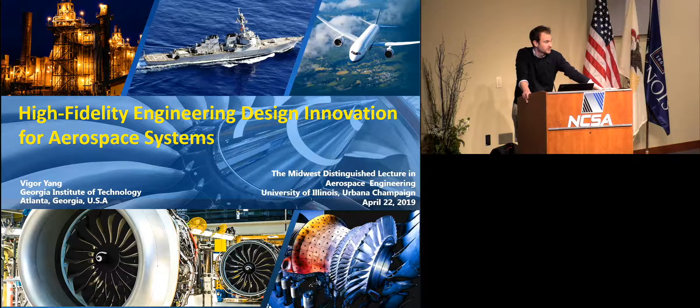This is more than a laser pointer.

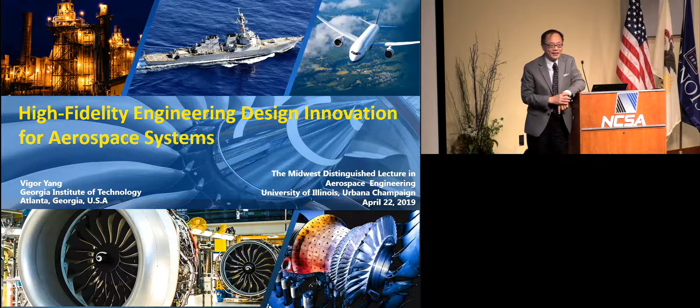Thank you, Dan, for this wonderful introduction. I couldn't be more grateful to the friends and colleagues here. It's a tremendous honor to give the lecture today. When I received the bag from Dan, I thought Dan would first present to me an empty bag, then depending on my lecture, he may put the gift into this bag. Yes, thank you. Also thanks to Cedric for the tremendous effort. As you mentioned, to organize one lecture by itself is a tremendous effort, let alone 4 lectures within a week. Thank you once again. And Stacy, thank you so much. I just couldn't be more grateful to you.

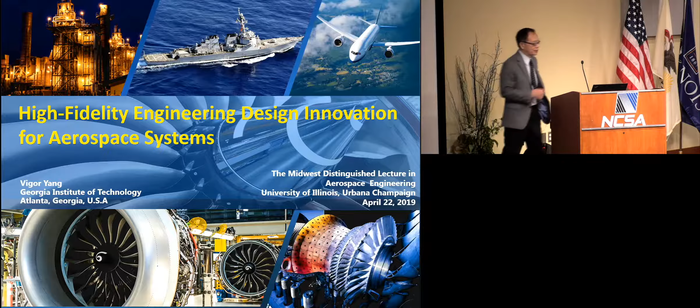What I'd like to do for the next 45 or 50 minutes is share some of my perspectives on high-fidelity engineering design innovation for aerospace systems. That's what I'd like to do, yes.

Let me start with human space exploration and transportation. Human space exploration commenced in 1957 when Russia put the first satellite in space. Then in the past 70 years, tremendous progress has been made. For example, the ICBM in the 50s and early 60s, and in 1969, the Apollo program, which essentially allowed us to put 12 men on the moon.

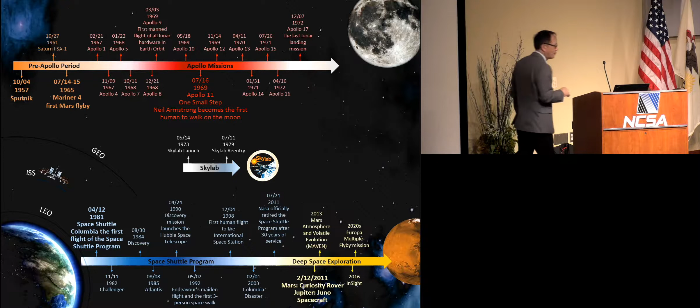In 1981, when I was a grad student at Caltech, the space shuttle program started, running all the way through 2011. Within that 30-year time period, there were 135 flight missions under that program. Lately, everybody is so excited about Mars exploration. That's tremendous progress made in 70 years.

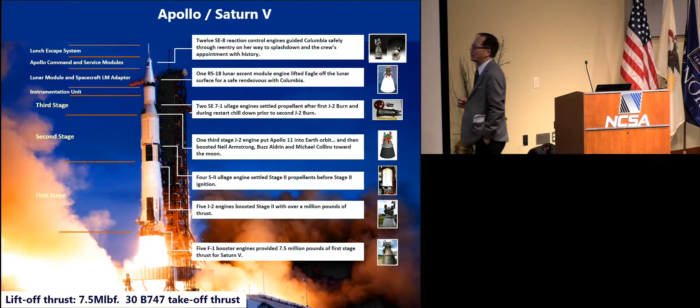But what about the propulsion system? From that perspective, in the past 70 years, there were 32 major rocket engines established within the United States. The number is not that big, but every single engine we established in the past 70 years was a tremendous accomplishment.

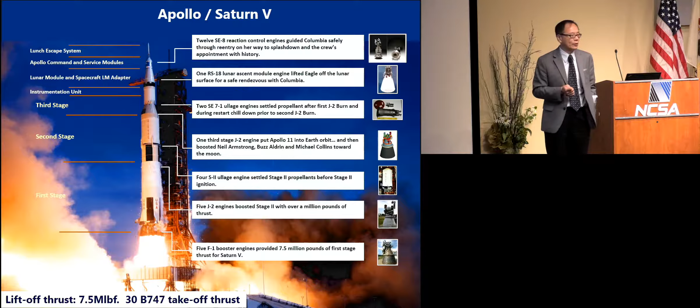Here is a very typical example. The picture shown here is the Saturn V launch vehicle used in the Apollo program. Looking at the first stage, there are 5 F1 engines. Each engine produces a thrust of somewhere around 1.5 million pounds. That's equivalent to 6 Boeing 747 liftoff thrusts, showing the magnitude.

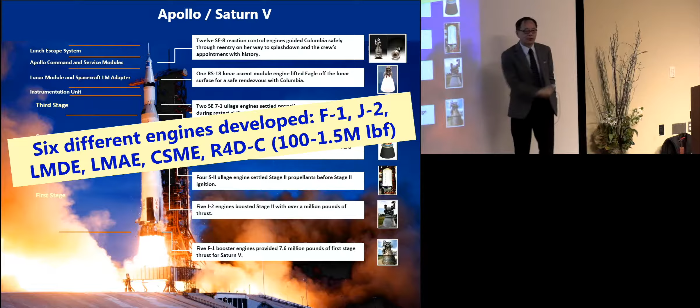For the entire Apollo program, the nation developed 6 different kinds of engines, starting with the F1 engine, a very mighty engine, all the way to reaction control engines. For example, that thrust level is about 100 pound force. This shows the range of thrust of those 6 engines established in the 1960s.

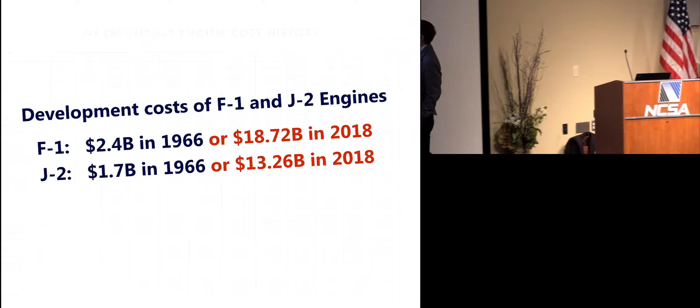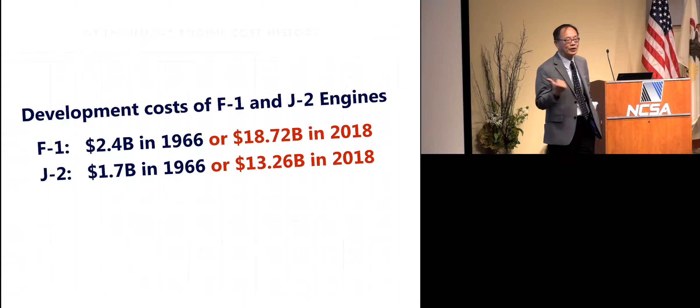For rocket engine development specifically, essentially we do not know how much money we spent on that. Out of my personal curiosity, I invested almost 2 years' time to find out the money we spent on development of the F1 engine. This is my number. The background is the spreadsheet. Probably you noticed that I personally went through, to your surprise, almost several hundred pages of spreadsheets in order to get this number.

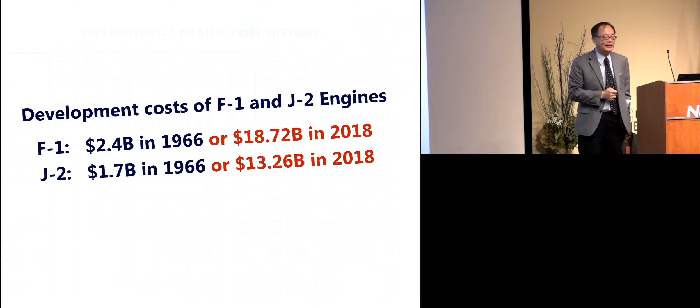For the F1 engine, the nation spent $2.4 billion, but that's 1966 money, equivalent to $18.72 billion in today's money. What about the upper stage engine, J2, the second stage? That engine burns liquid oxygen and hydrogen. For that engine, we spent $1.7 billion.

Again, that's 1966 money, equivalent to $13.26 billion in today's money. So that's the money we spent on developing those engines.

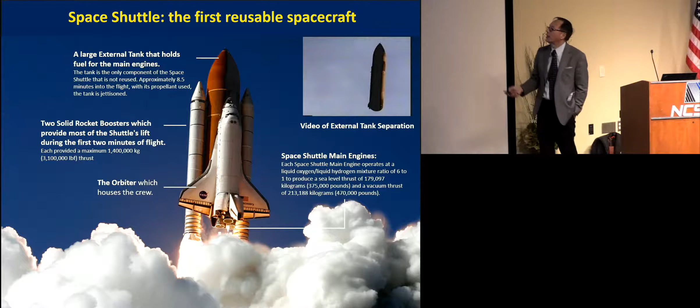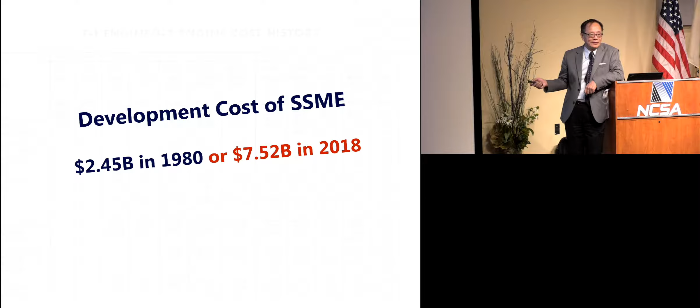What about the space shuttle? Well, the space shuttle essentially was the product of the 1970s and 1980s. For the space shuttle main engines, there are 3 shuttle main engines down here—yes, 1, 2, 3. The next question is how much money we spent on development of the space shuttle engine. That's $2.45 billion in 1980, equivalent to $7.5 billion in today's money.

So keep in mind those big numbers. But what about the future? Well, we still need rocket engines, but these days we are talking about 3 different kinds of missions.

First, of course, we are still interested in LEO missions, near the Earth—that's essentially commercial and military flights. Then the next thing is we want to go back to the moon, which means several hundreds of thousands of miles. Then, in the future, probably 10 or 20 years from now, we'll be able to send people to Mars—a long distance. But no matter what we do, we still need rocket engines.

So the question is: how much money should we spend on developing our next generation engines? There was a huge debate about 5 years ago in Washington, D.C., because the issue was, should we develop our next generation engine, and if yes, how much money should we spend, and how much time can we afford?

I was engaged in that very serious, and frankly speaking, very heated discussion. I was asked by a senior colleague in DC how much money we should spend. I tried to avoid that question because it's a very political one. But at the end of the day, they put me in a corner and said, you must give us a suggestion. So I said, well, looking back, 50 years ago the nation spent $2 billion.

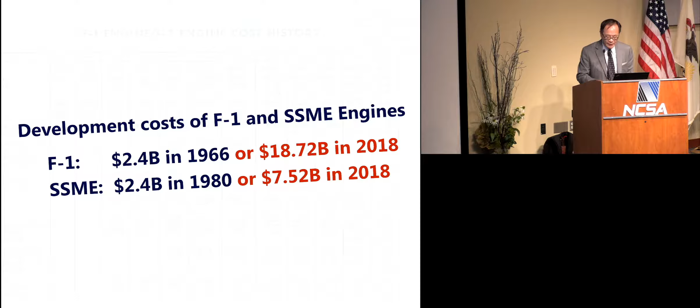The reason is this industry hasn't got a chance to incorporate recent and projected advances in other areas, for example design, advanced manufacturing, materials. So if the nation cannot accomplish that within $1 billion and 4 years, my suggestion is just don't do it. Why not wipe out that industry and use our money for something else. So that's my advice to the government at the time.

Then the next thing is this: if it's $1 billion, tell me, if you are a decision maker in DC, then you say $1 billion. The next question is, how would you like to spend that money?

Well, let's go back to the history. This shows cost versus development year. In the past, we spent 2% of the entire budget on initial design. Engineering, from day one all the way to completion of the program, that's about 10%, no, about 15%. And then most of the money was spent on testing, trial and error. If one design didn't work, then let's redesign, then retest.

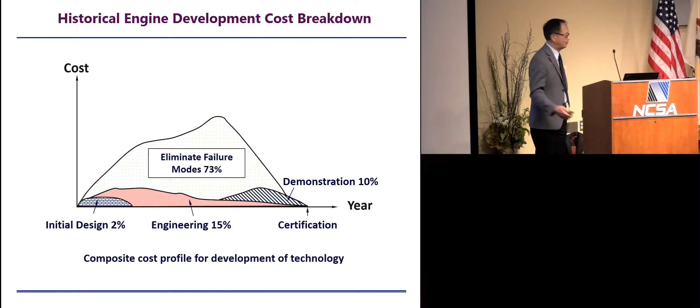And the remaining part, 10%, is for system integration and demonstration. So the issue is: is this a good business model? If the answer is no, then what should be a good business model? And then I also shared with people...

...some historical data. Taking the F1 engine in the Apollo program as an example, that's the money we spent. The number of tests for single engine certification, almost 2,000, more than 2,000 full engine test firings. That means rework, redesign, retest, and so forth. That number is 203 times. That means each rework cycle cost us $9 million at that time.

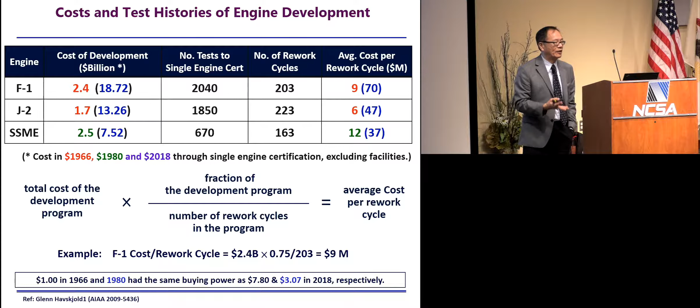That's equivalent to $70 million in today's money. So that means if the initial design is not very close to the final design, and we have to redesign and retest, each rework cycle would cost us 70 million. Who can afford that? Of course nobody can afford it. Then that goes back to the next point.

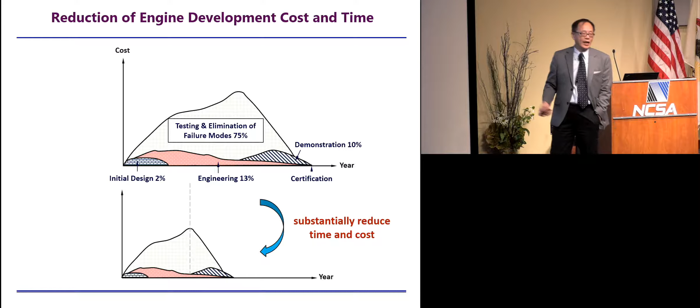Well, the next point is: we want to substantially reduce the time duration for engine development, and also substantially reduce the cost. So from that chart, down to this one. Then if this is the case, the next question is, how should we do the business? Well, this is what I proposed, yes.

We should make a major investment in the early stage. In other words, initial design probably should take 15% of the entire budget, to the extent the initial design is very close to the final design. By doing that, we can substantially reduce the resources required for testing and elimination of failure. So this is a new business model.

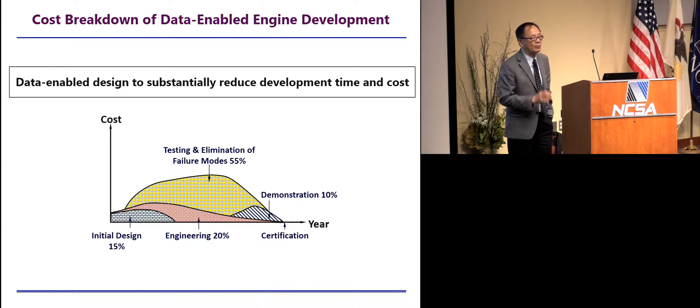Well, conceptually, this is very nice. Everybody would love to see this chart. If you can make your initial design very close to the final design, everybody would agree with you. But scientifically, technologically, and engineering-wise, how to accomplish that? That's a big issue these days.

So, well, here, I'd like to give you a simple example, still using rocket engine development as a case study. Then we see how we can proceed to make major changes, and also at the same time substantially elevate our technology basis.

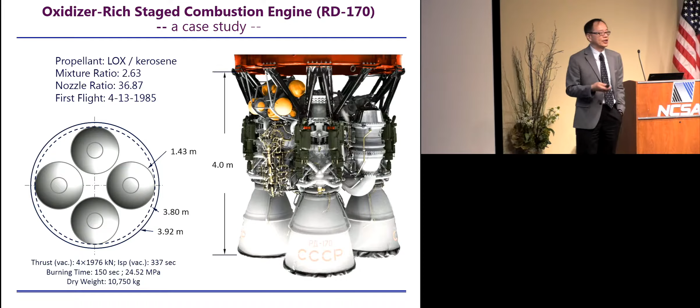Well, what we're looking at is the most advanced rocket engine ever produced in history. This is a Russian-made engine called RD-170. RD-170 produces 1.75 million pound force. It's even bigger than our F1 engine, but that's one aspect. The second aspect is this engine is so much more efficient than American-made rocket engines, about 10% more efficient in terms of ISP.

Which means specific impulse and so forth. Well, if we focus on the combustion system, propellants burn in two stages, one in the pre-burner, the second in the main chamber. In the main chamber, pressure is very high.

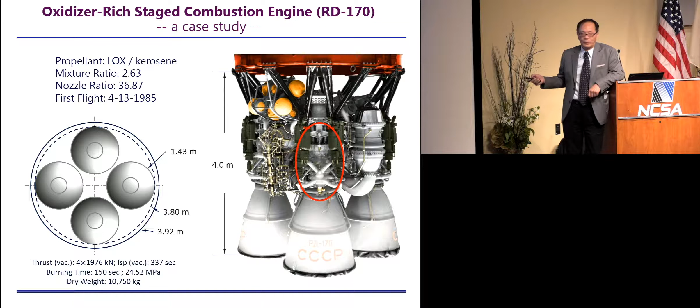Pre-burner pressure is well above 7,000 psi. For comparison, an aircraft gas turbine engine operates at a pressure anywhere between 100 to 300 or 400 psi. And the main combustion chamber pressure well exceeds 3,000 psi. So, very, very high pressure device.

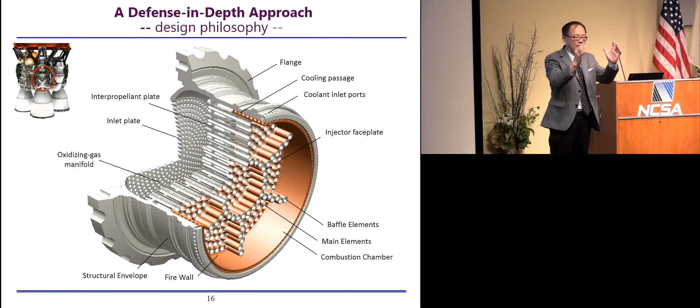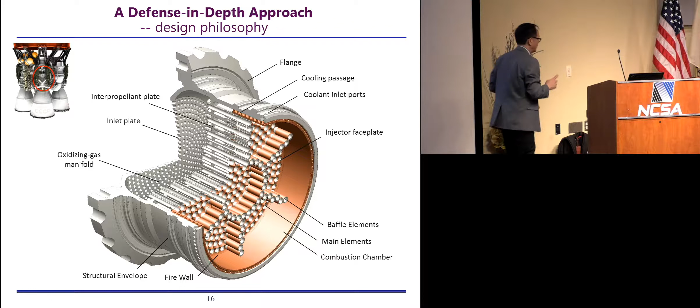So I have to say, this is a rather complex system, and the physical dimension is not too big - about that big. Can you imagine that? For such a limited physical space, the device is able to produce such a huge thrust, sufficient to lift two Boeing 747 aircrafts. So that's the scale of the energy.

This one shows another view of the combustor. So now we want to develop such a high-performance combustor. The question is, how should we proceed in order to save money and also make sure everything can be done in time?

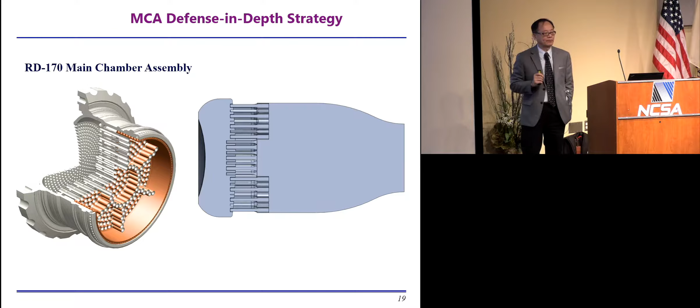Well, first thing is this: what is the purpose of this design? The purpose of this design, of course, is to make sure this combustor is high performance, almost 100% combustion efficiency, and also everything is very stable - there's no unnecessary unsteady motions within this combustion chamber. If that's the purpose, then the next thing is we have to develop our design strategy.

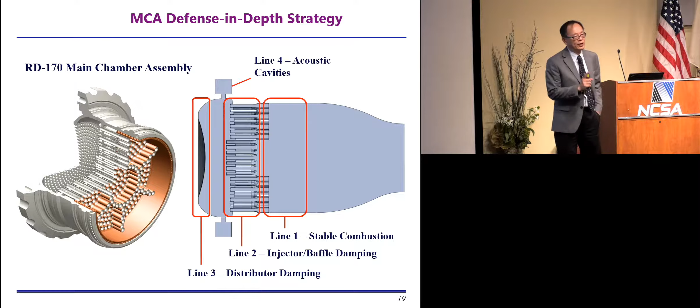What is our design strategy? Well, the design strategy is: number one, whatever injectors we develop must be 100% stable by requirement. Then we use internal viscous damping to provide the design margin. If that design margin is not sufficient, then the third line of defense is we want to utilize the acoustic damping provided by the flow distributor. If those three lines cannot provide us with sufficient design margin, then the final resort is we want to use an acoustic cavity.

Conceptually, we consider this so obvious, right? Everybody probably would do the same thing. But I have to tell you this was not a design practice used in the US in the past 60 years. In the past 60 years, whenever we develop a rocket engine, the first thing is the injector - we do our best to make sure it's 100% stable, but we're not quite sure whether it's 100% stable or not.

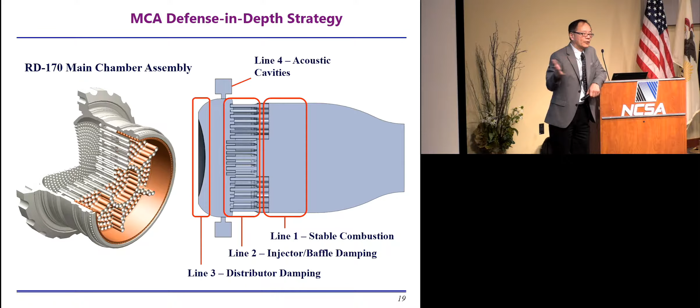So let's assume this part is 90% stable. Then we want to utilize the internal viscous damping and other devices to provide the design margin to make sure it's 100% safe. And I have to say that kind of design strategy must retire. In today's environment, we have to be very bold to make sure this one is 100% stable. So the issue is, design strategy must be established upfront. Otherwise, we may not be able to accomplish what we really want to do.

Then the next thing is, every system must be regarded as a dynamical system. Because it's a dynamical system, we need a mathematical model to characterize and describe the dynamical behavior of a combustion chamber. In this case, what we did is we developed a wave equation with many source terms on the right-hand side. Then we use this equation to characterize the dynamical behavior of this combustion chamber.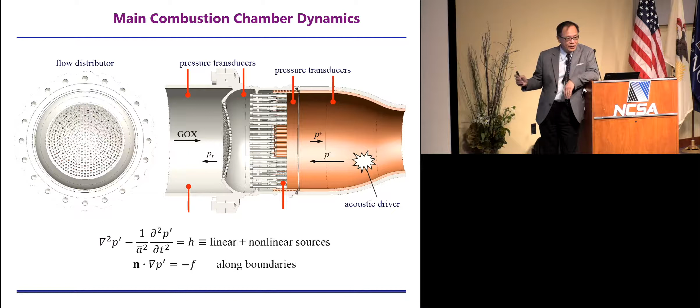So conceptually, we may want to consider this a very high-level model and so forth. But I have to say that it's easy to write this equation - what about those source terms? That's number one. And number two is how to solve this equation, especially with a complex geometry, and especially with very complex inlet and outlet boundary conditions. So those are the practical issues that we have to address.

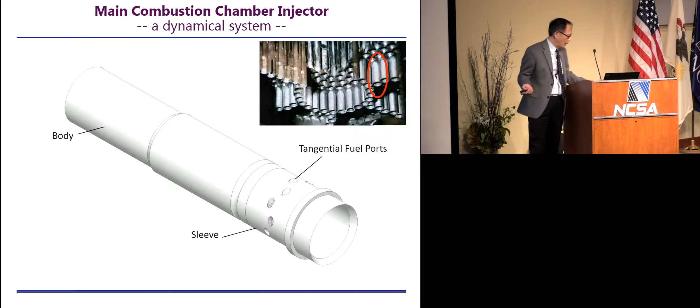So then another thing is this: when we look at that system equation, which essentially is a wave equation, there are many source terms. So how to describe those source terms? Well, in that regard, we have to go back to the injector, because combustion occurs in connection with each single injector within this device. Well, this is the injector that people used for this particular case.

And this one shows more detailed design. Essentially, what we're looking at here is gaseous oxygen is delivered into this injector, and the kerosene fuel is injected tangentially through the outer annulus. Then combustion occurs down here.

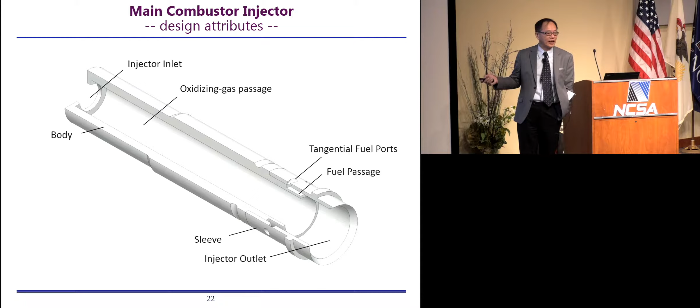When we look at this geometry, then the next thing that we have to ask is how many design parameters are associated with this generic design. Essentially, there are 12 parameters - for example, the length, the diameter, the inlet confinement, and also location and size of kerosene fuel injection. So there are 12 design parameters for this case. And number two is, what may be the most appropriate range of each design parameter? Taking this RD-170 rocket engine as an example, the length of this injector is on the order of 100 millimeters.

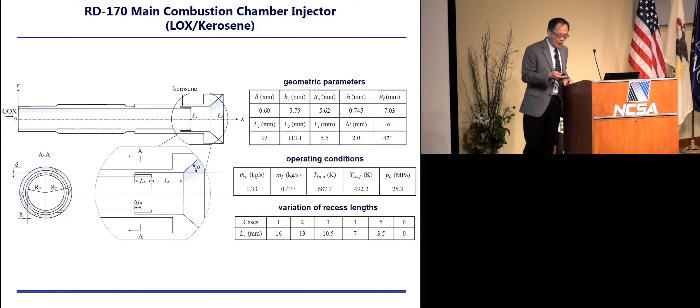Combustion occurs down here, and the physical domain that determines the combustion behavior is very, very small, on the order of 0.5 millimeter. If we do not understand the combustion behavior within that very small spatial domain, or if we do not know how to control the dynamics within that spatial domain, then the chance to make a stable rocket engine is almost Mission Impossible. So that's the challenge we are facing these days.

Well, and what about the physics? Before we discuss the design, what about the physics? Here I want to share with you 3 different cases. Case 3, down here, we have the center tube protruding into this area. In this case, the protrusion always goes to the entrance of this taper region. The first case, there's no protrusion at all.

So from the design aspect, we have to ask ourselves, there are 12 design parameters. For such a design, if we put this device on the test stand, if something goes wrong, which design parameter should we change? That's question number 1. Question number 2 is, if we have to change the design parameter, how much should we change? So those are the issues.

In the past, those issues could only be answered through test firing, so-called trial and error. But these days, we must be able to answer those very basic questions up front in the initial design stage.

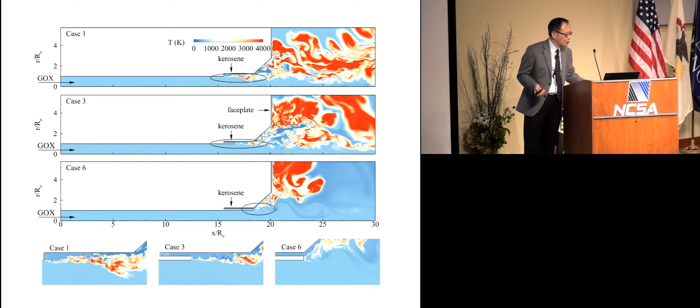So that's why everything must be high fidelity, in order to make sure we have a full understanding of the situation.

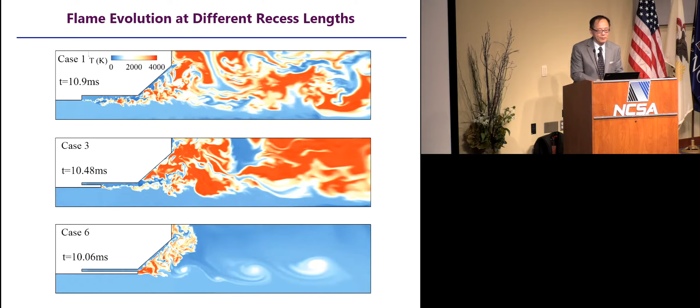The next one shows some movies about the flame evolution down here. As you can tell, the protrusion, the length of the protrusion of this very small component, determines the entire combustion dynamics. So this is pretty much the situation. Once again, the physical length of this inner tube is around 0.5 millimeter.

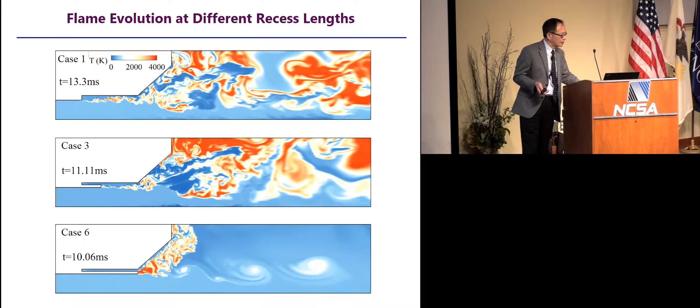But then, another thing - oops, the file is a little bit too big. Oh, sorry.

As I mentioned, that's for the injector design. Then the next thing is this: we can do high fidelity simulation or modeling and simulation for a given design, but then the next thing is, whether or not that's the best design we can possibly have. And what is the best way to survey the entire design space? Because we have 12 design parameters there.

Well, to answer that question, we have to utilize the most recent advances in data science. We have to use emulation. So the procedure is the following: we started with a conceptual design, say this is my injector, there are 12 design parameters. For each design parameter, we provide a range of dimensions.

Then after that, what we really want to do is survey the entire design space. But with 12 parameters, to survey the design space using high-fidelity simulations, such as large eddy simulation, is not very practical because you just have way too many cases to do it. So the next thing is we have to apply DOE techniques, design of experiment techniques, to down-select the number of cases. Then after that, we do the so-called emulation.

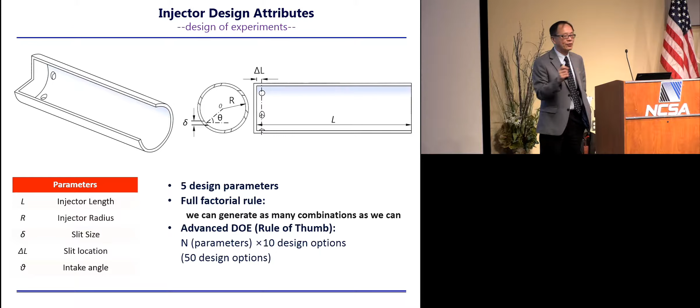So 5 design parameters. For each design parameter, let's assume we provide 10 choices. Then the number of choices becomes 10 to the 5th power. That number is huge - practically impossible. So we apply a statistical method, so-called design of experiments, to down-select to 30 cases.

Hopefully, those 30 cases can represent the situation for the entire design space. There are a number of techniques we can use, for example MaxPro or other design of experiments techniques to do it. But for this particular case, we consider 30 design cases.

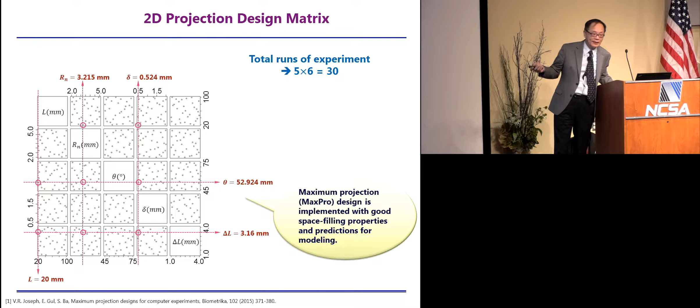This shows the space filling of the techniques we used, and the range of dimensions we consider. We consider a very short but much wider swirler, or a very long but much smaller injector. This shows the parameter range, and through the DOE process, we down-select 30 cases.

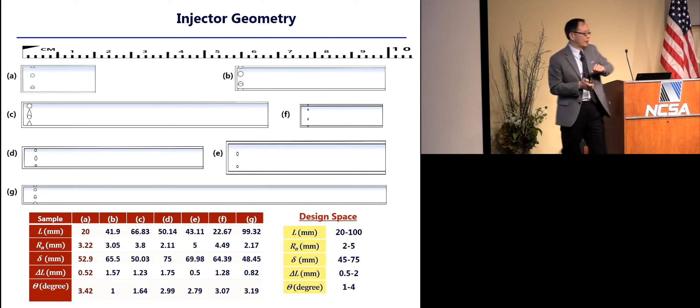The next thing is: what is the best way to describe the situation over such a design parameter space? That's a real issue, and it requires a technique we call emulation. Some people call it kriging, and some say it's part of machine learning or even artificial intelligence, depending on what you want to call it.

We consider 30 cases. This is case 1, that's the injector, then this is the downstream flow domain, and that's case 2 and case 25. The technique we used is called common POD technique — we map different geometries to a common geometry. We conducted large eddy simulation for each of those 30 cases, then mapped the results to a common configuration, which is why it's called common POD technique.

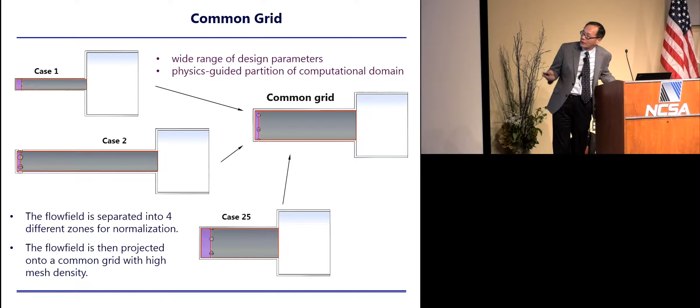Once we have done that, this shows the different domains. Once we have done that, we can quickly survey the entire design space, very quickly.

This shows the emulation results. The upper half shows the large eddy simulation results, and the lower part shows the emulation results. What we did here: we consider 30 cases covering a broad range of parameter ranges. After 30 large eddy simulations of those cases, we obtained the training database. Then using that database as the basis, we do so-called surrogate modeling, but in our case it's called emulation.

This shows the emulation results. For this particular case, the results are very encouraging. In terms of accuracy, for example the time evolution and the different spectral information, the accuracy is almost 99%. The good thing is this: large eddy simulation may cost hundreds, thousands of CPU hours minimum, but emulation you can probably do on your desktop computer in less than one hour.

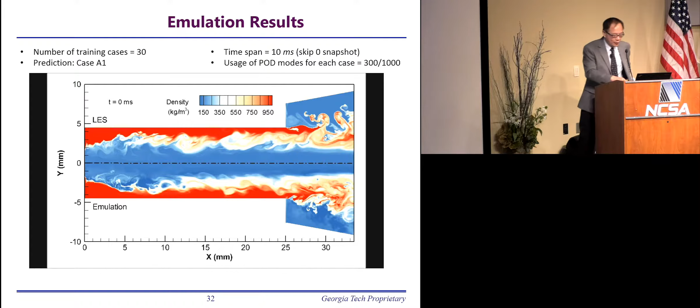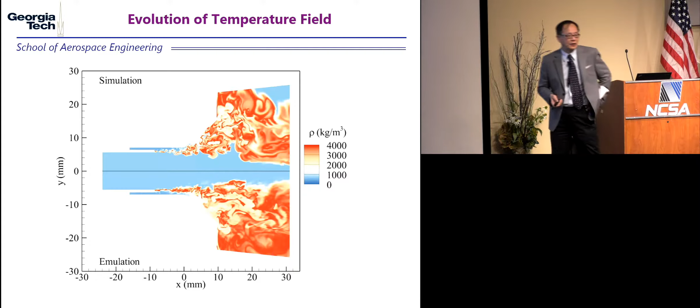That's the case for a very simple injector. Then what about a more complex geometry, taking the RD170 injector as an example? For this combustion case, the situation is much more complex, but we still do exactly the same thing to help us survey the design space. The simulation results are shown there, and our emulation results are shown below.

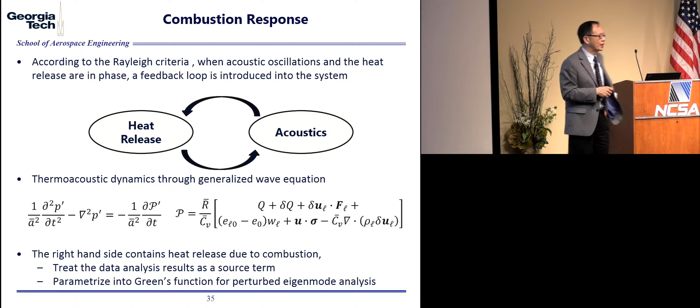Another thing we have to be concerned with: so far we only discussed simulation and emulation. What about important information such as combustion response? Because all unsteady motions within a combustion chamber come from unsteady combustion. This is another part of data science which can help us tremendously — using the latest and projected advances in data science, we are able to identify the most important attributes to combustion response.

Another thing which I think is very important: although the emphasis here is high fidelity simulation and data science, what about experiments?

Experiments play a very important role in this area, for verification and validation purposes. We established a very high pressure combustion rig, able to operate at very high pressure, up to 2,500 psi.

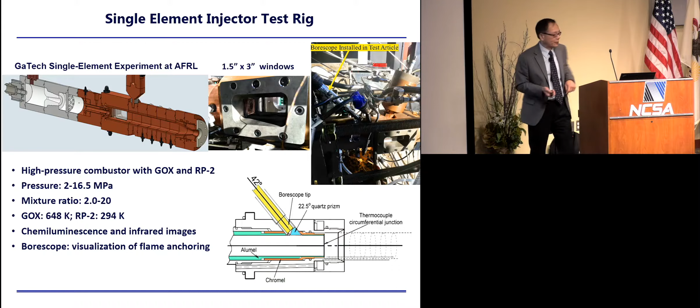We conducted this experiment at Air Force Research Laboratory, which provided us with air supply and the facility. We brought our combustion chamber there to do the experiment, then used that data to help us understand not just physics, but also to validate our numerical results. So this is another aspect.

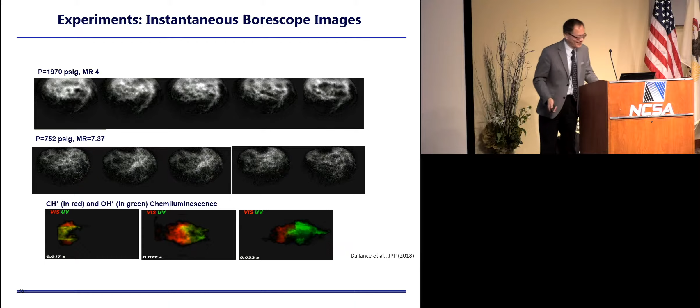I see Tonghun here. Tonghun is probably the very best combustion experimentalist in the nation. This is yours, yes. All right.

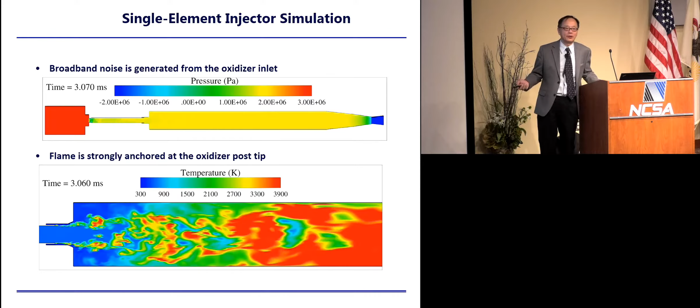This one only shows the numerical results anchored by the experimental data. This is for the high fidelity part.

Another thing I want to mention: so far we only discussed the behavior of a single element injector. But for a practical, complex system, taking RD170 as an example, we have 331 injectors. So what is the best way to package those 331 injectors within a combustion chamber? That's another very important design aspect we must address.

To make the story short, we should be concerned with the spacing between each pair of neighboring injectors. That's one issue, and the arrangement is another. The third issue is should those 331 injectors have exactly the same dimension, or should the dimensions possibly vary by a very small amount? That is a very important issue.

In the old days there was no guideline, especially no quantitative guideline. But in today's environment, we can provide a very specific quantitative guideline as to the best way to determine the tolerance and also the arrangement.

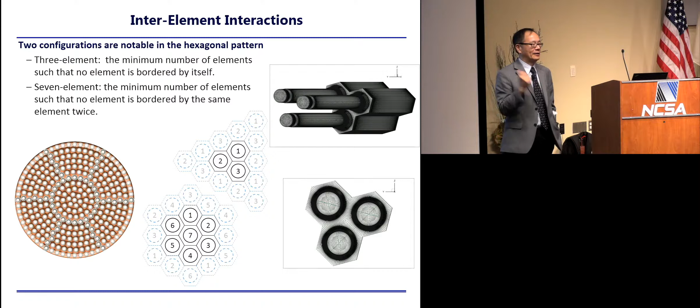You'd go crazy, right? The first 100 engines went extremely well, but engine 101 failed. Then what are you going to do? I would consider that our biggest nightmare. So the question is: can we avoid that nightmare at the design stage? The answer is yes, we can do that.

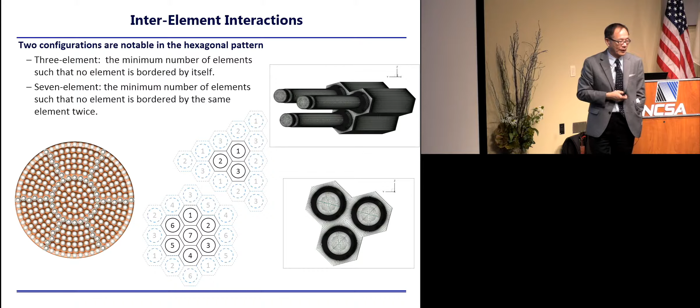In practice, among those 331 injectors, we can divide that huge number into small groups. Then for each group of injectors, we vary the dimension slightly, to the extent that statistically it's a sort of random distribution, to bypass that problem. So there are ways to do it.

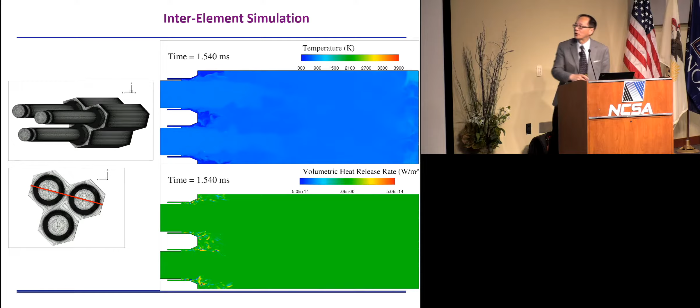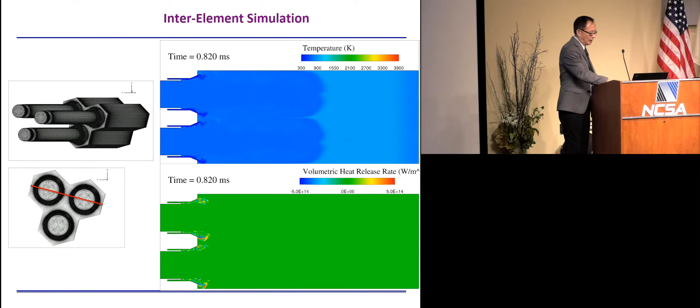The last thing I want to share with you is a detailed numerical simulation for a cluster of injectors. For this particular case, our concern is the spacing and also the parameter variation for those injectors. This is another domain of our design space that we should be concerned with.

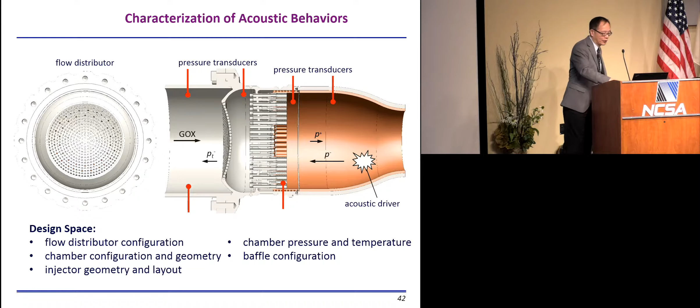Once we have accomplished that, we should go back to our system level equation, because through the process I just described, we're able to solve that wave equation. Once we know all the source terms in that equation, collectively we can characterize the behavior of this rocket engine combustion chamber. So that's how we solve this problem, from the design stage.

To wrap up, I have to say we are already at a different stage in developing the next generation of engineering products, especially for complex systems. Today I presented an example of a rocket engine, and the process, as I mentioned, should be entirely high fidelity based.

Sometimes we hear that for design we may want to use a multi-fidelity approach to save time and effort. But it's my personal opinion that we are already at a stage where we can do higher fidelity modeling and simulation, such as Dan's work and many others in the audience. If we can do high fidelity, why don't we just do high fidelity up front?

And then, but that's not everything. After the high fidelity simulation, we must use new techniques in data science area. For this particular case, I mentioned emulation. That helps us survey the entire design space. For large eddy simulation, each case requires several hundreds of thousands of hours typically, and probably that's only for a small case. But emulation, you really can do it on your desktop computer in less than 1 hour. That helps us survey the entire design space. Once we finish the survey of the design space, what's next?

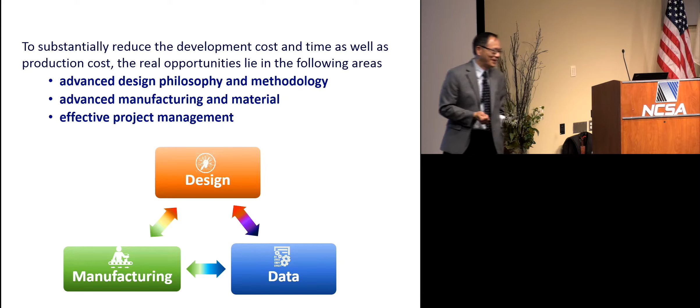If people ask you how much money we should spend on developing our next generation rockets, historical number, one more time, is $2 billion. But that time is gone. I would suggest $1 billion. And perhaps then you can further reduce the price down to $500 million. Make a huge suggestion to Elon Musk, and I'm pretty sure he will love you.

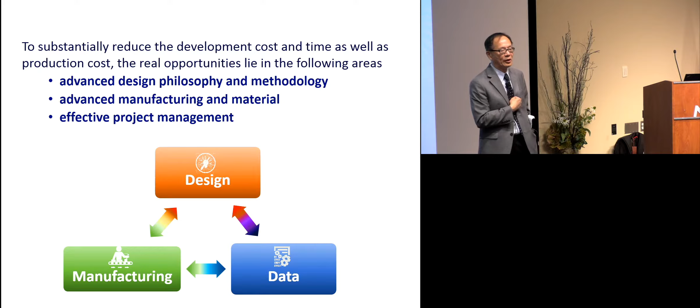And again, I have to say that we are now in a different time. If business as usual, as we did in the past 70 years, that means this business has no future. Then the next question is, where's the future? From the design perspective, I think the future is based on the organic collaboration between engineering science and data science. That's my humble opinion. Thanks very much.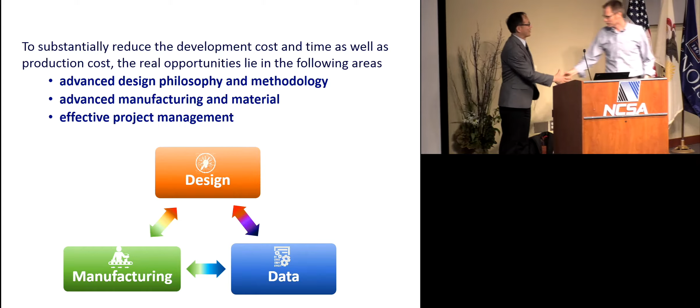Thank you very much, Vigor. Sure, thank you. And let's open the floor up for questions on the seminar. I mean, I only have to make Elon Musk happy. You guys can come up with a question. Oh, you can make Jeff Bezos happy. Go ahead, way in the back.

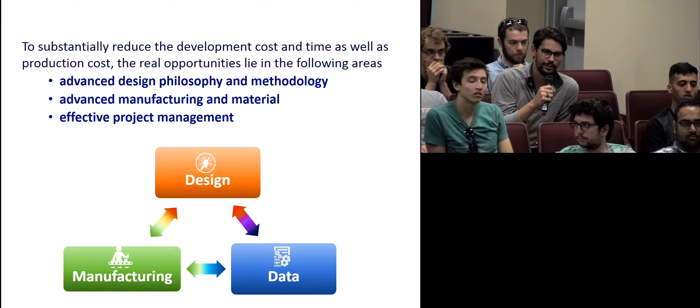Sure, hi, thank you for your talk. So in the presentation, you went off of a reference or existing design to apply these techniques to advance the rocket engine. How do you see data science feeding into new or novel topologies that maybe we don't have a reference design for? How can we use these techniques to design new things?

Yes, if you want to come up with a totally different design for the same purpose, yes, taking this rocket engine as a specific example, if you want to come up with a different architecture, sure, you can do it. But there's a risk down there. Keep in mind, design of a flight vehicle in today's environment is not something brand new. People have been doing that for years. So the issue is, what is the best way to introduce innovation? And I think that's the key. Innovation may come from a totally new, different design, as you just mentioned, or innovation may come from the process. And today, I only talk about the process. What is the best way to introduce innovation into the design process? If you have different ideas, for example, different architectures, I think that's much needed and welcome.

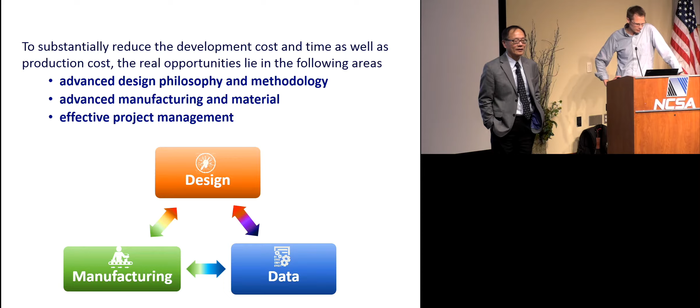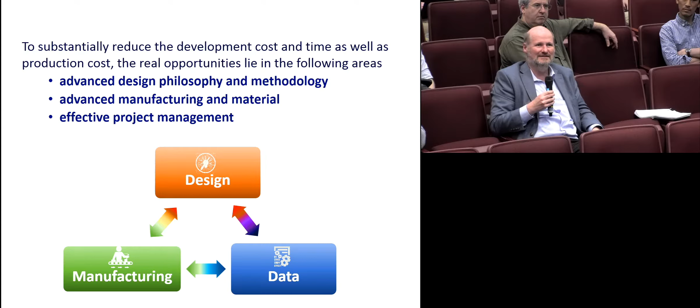All right, another question? Thank you. You describe the cost versus time, and showed that there's a potential for evolving from spending 70-some% on testing and changing the design down to, I think it was about 50%. Would a method like the one you describe here allow you to reduce this even further, to the point where you could spend only 20% of your time and therefore reduce the cost tremendously, because I assume that most of the cost is spent on the redesign and testing of all these engines? Are there other examples of very complex technological achievements in which this kind of reduction has been achieved?

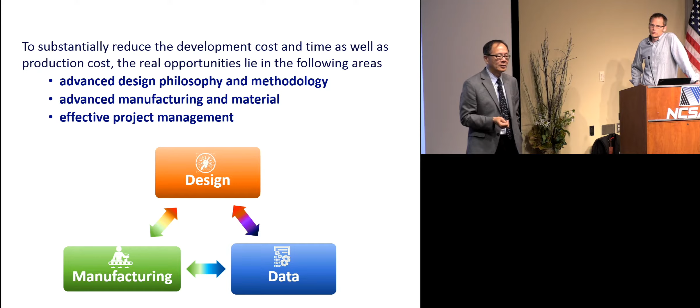Yes, that is the goal. Reduction of the resource spent on testing, I would say, will have to come from the design. As I mentioned, if it's a good design, then we can bypass a lot of unnecessary testing of bad designs. That's the whole purpose, that's why I propose this. Historically, whether it's aircraft engine or rocket engine, the initial design accounts for only 2% of the entire budget. Can you imagine that? Folks spend only 2% of the budget on the initial design. And that's not acceptable. But then the next question is, what is the right percentage for the initial design, to the extent the initial design is very close to the final design? That is a question to be answered. But here I propose 15%, maybe 20%. But that's 20% of a substantially reduced overall budget, not 20% of the original budget. So the saving is tremendous. And I think that time is coming.

Taking space transportation and exploration as an example, what limits our capability to do space propulsion? Say, for example, if you can afford $20 million, you can travel to space for 3 days. That's the market price. Who can afford $20 million? But we want to reduce that cost. Do you think $200,000 is a reasonable price for a 3-day travel to space?

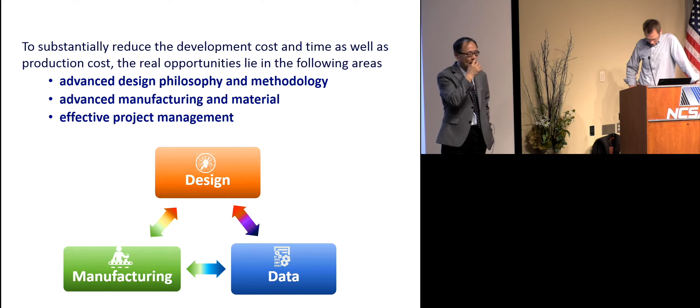For deep space exploration, the limiting factor is one: travel time is way too long. If you want to go to Mars, you have to invest almost 3 years' time. One-way trip could be anywhere between 150 days to 360 days, depending on the relative location between Mars and Earth. And once you arrive there, I'm sure you want to spend time looking around, right? Maybe 6 months, then another year to bring you back. So the propulsion system needs a fundamental revolution, basically. And it all comes from here.

So I think something important is the arrow down to manufacturing. In the 60s, design probably didn't take as big a part of the process because realization was a big problem as well. So you might design something that has very fine features that could not be machined, or new machining processes might have to come about. What is it today? I'll throw in additive manufacturing, although it doesn't really apply to those temperatures yet. But what is it today that can facilitate the translation of those designs faster to real systems? I'm sure there's compromise in the process. In the past, there was a rough design, but then it had to be translated to something passable, right?

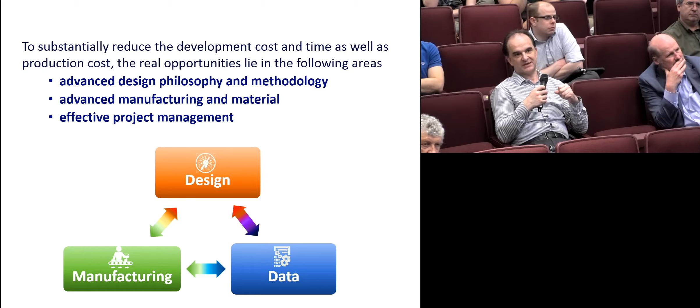Yes, now maybe it's a little bit easier, right? How have materials enabled your ability to design something more precisely and realize it? New materials or new processes? Materials for sure play a very important role for obvious reasons. And then the next thing is manufacturing. 3D manufacturing has become a very important factor these days. Here I want to give you one example.

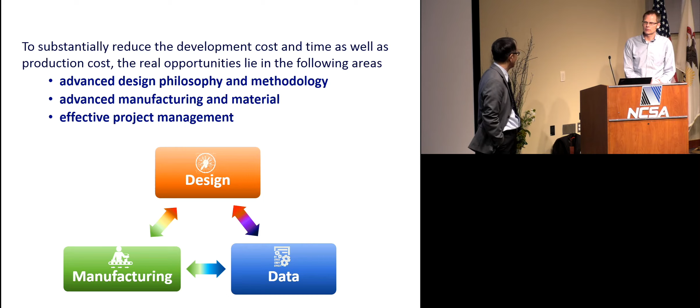Let's go back to a rocket engine. What is the cost of a rocket engine, by the way? What is the price tag of an aircraft engine these days? Well, the formula is very simple. For an aircraft gas turbine engine, it's about $250 per pound force. And for the rocket engine I just mentioned here, probably the market price is 30 million.

Now, if we apply more advanced materials and manufacturing, we can substantially reduce the price. I'm talking about the practical aspect. I was told, if we apply 3D printing technique—in fact it has already been demonstrated—they can reduce the price by 75%. It's tremendous. So that offers many opportunities in research, manufacturing, and materials. It's a very interesting business, basically.

But today I use a rocket engine as an example. The same thing applies practically to all aerospace engineering products.

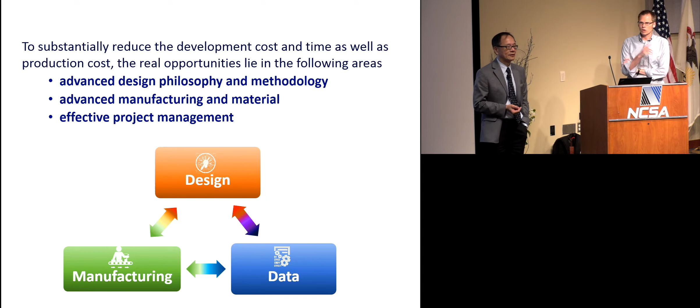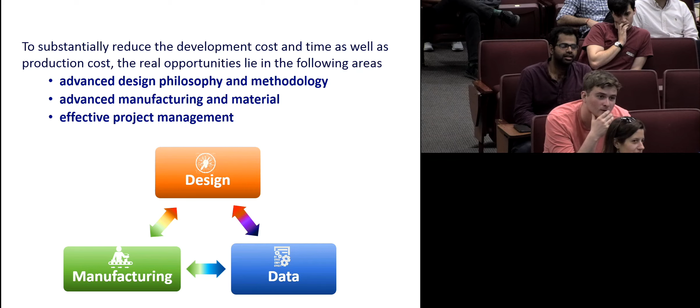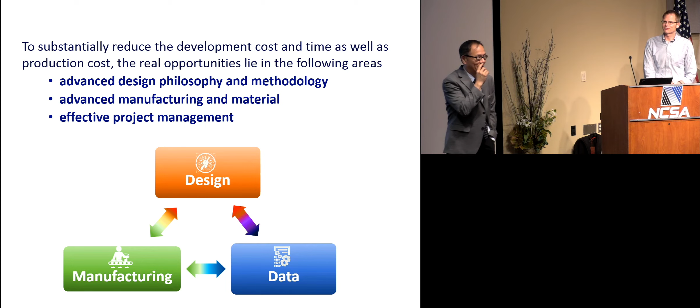Do you have any estimate for SpaceX's Raptor engine design total development cost, like you used to? Well, the question is, do I have any knowledge about the development cost for SpaceX's Raptor engine? Is that the question? Well, I don't know. It's a trade secret held by Elon Musk. I really don't know. But I can tell you, he doesn't have that much money to invest if it's 1 billion.

1 billion, okay, you'll be very surprised. 1 billion is a lot of money. The only person who can possibly afford it is our friend Jeff, not Elon Musk. So the short answer is, the development cost of a Raptor engine must be substantially less than 1 billion. That's for sure.